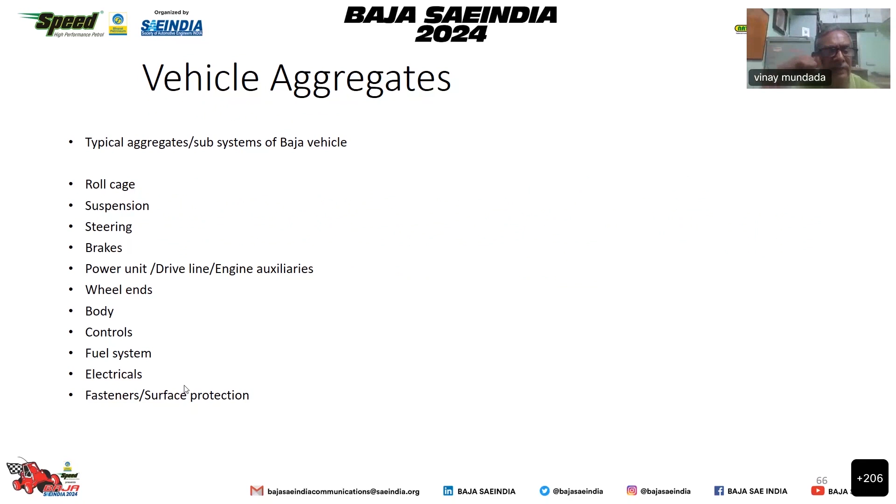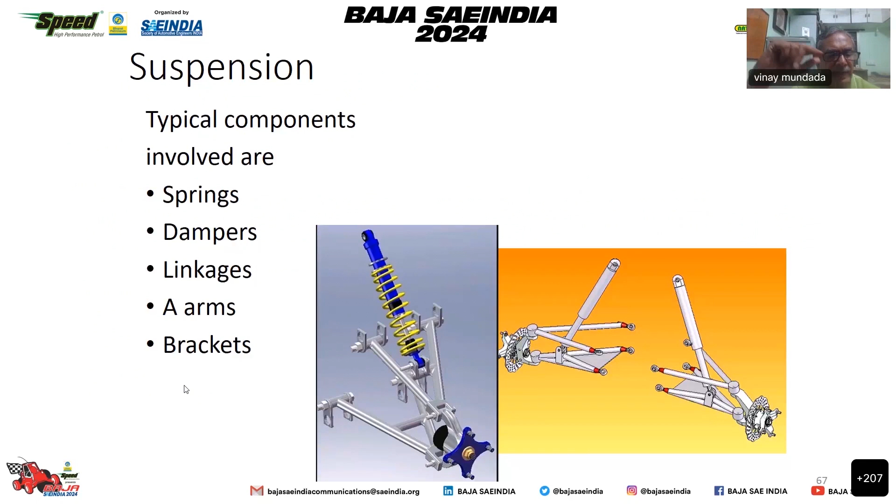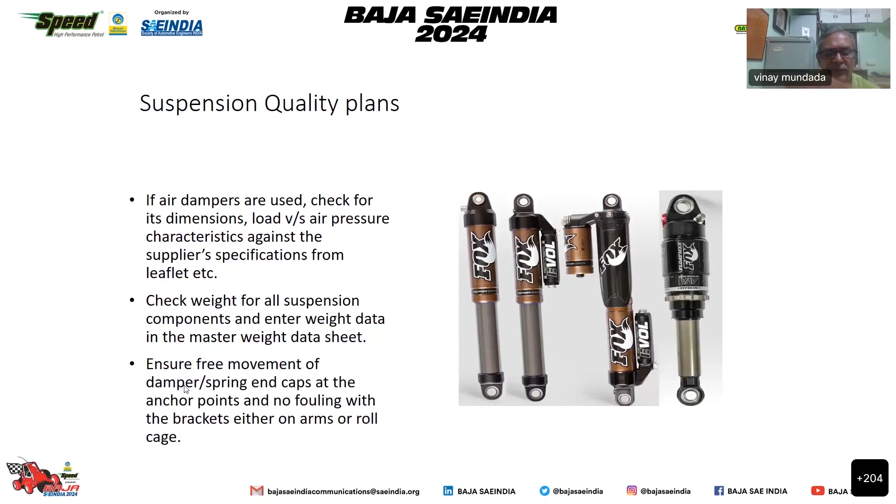This is the air suspension, which uses air dampers. If you are using these, you must know its characteristics, what pressure, what weight, all these must be checked. Ensure proper open and close length so that there are no issues.

Similarly on brakes, we have already talked about it.

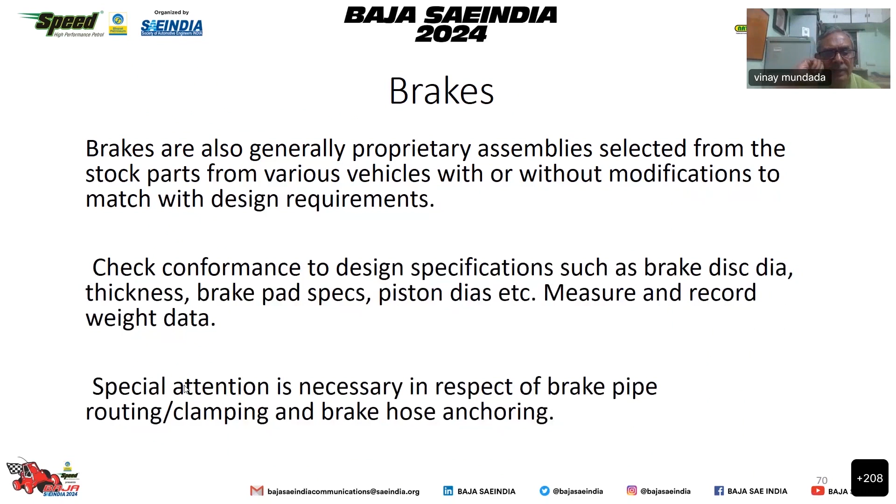Fasteners. I would like to emphasize more on fasteners. Proper size, proper strength, proper length, quality, grade, proper surface treatment. This is most important. This is one of the major failure items during the events at Pithampur.

Including in technical inspection, your vehicle generally gets rejected because you have used incorrect fasteners. So use of plain washer, spring washer, nylock nut, castle nut - this is very, very important, and 100% inspection is necessary. You must have color code marks after inspection, including tightening check.

Typical fastener - this is from your old textbook from the first semester of engineering.

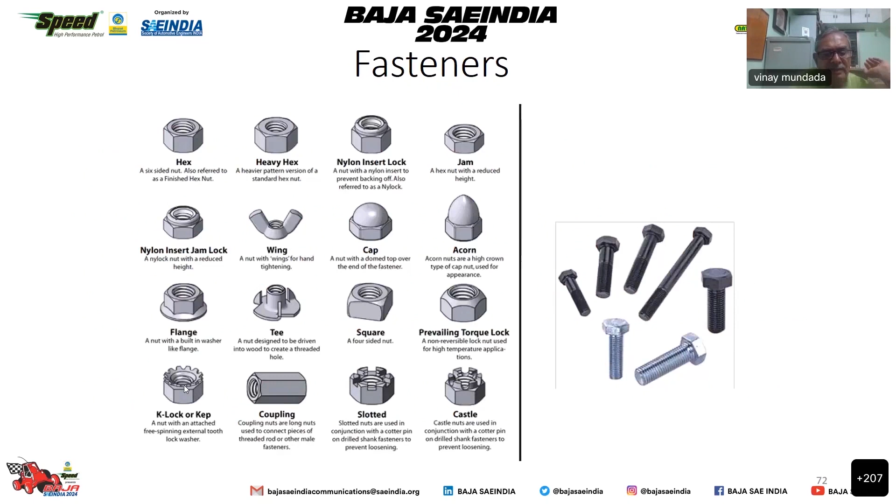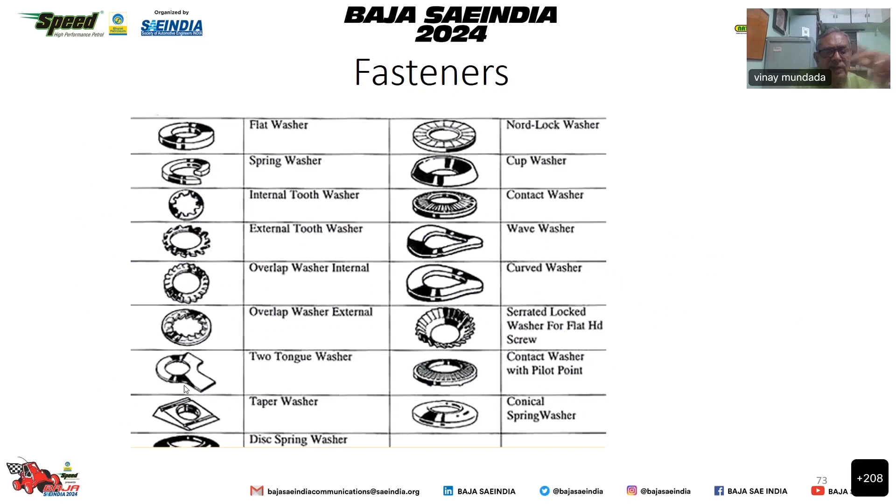Finishing and surface protection. Normally many vehicles come with all corrosion and all kinds of issues, whether surface treatment is not done. So everywhere you must ensure a proper fit and finish - no dents, no cracks, rust, weld spatter, sharp edges should be avoided.

Proper surface finish should be done using different types of plating, phosphating, blackodising, painting, zinc plating - whatever is necessary. This will ensure the vehicle appearance is very good, as well as it will be prone to fewer failures.

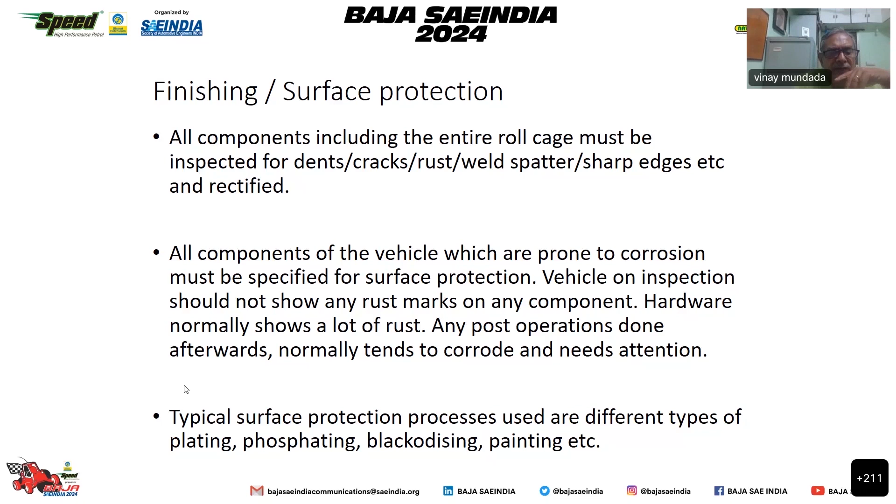I think this must be the last one. If there are any questions, we will answer now, or it can be done after Akhand's presentation. Hariharan, over to you.

Thank you so much, sir. We'll be taking the questions once Akhand sir is done with his presentation. Okay, good. Thank you.

I think Hariharan, we can take questions related to Mundada sir first and make him free, and then I can take the session later on. Sure, sir. Okay. Vishnu, can you please open the chat box? I already have opened the chat box. Okay, so participants, you can now post the questions in the chat box, and we'll try to answer them.

I think if the questions are generic, like mBAJA dates and all that, nothing related to Mundada sir, we can address that separately. If something specific to Mundada sir, we can take that right now. I think Hariharan, it would be better if you just simply read out one by one questions, and whatever is to be answered will be answered. The rest you can cover later.

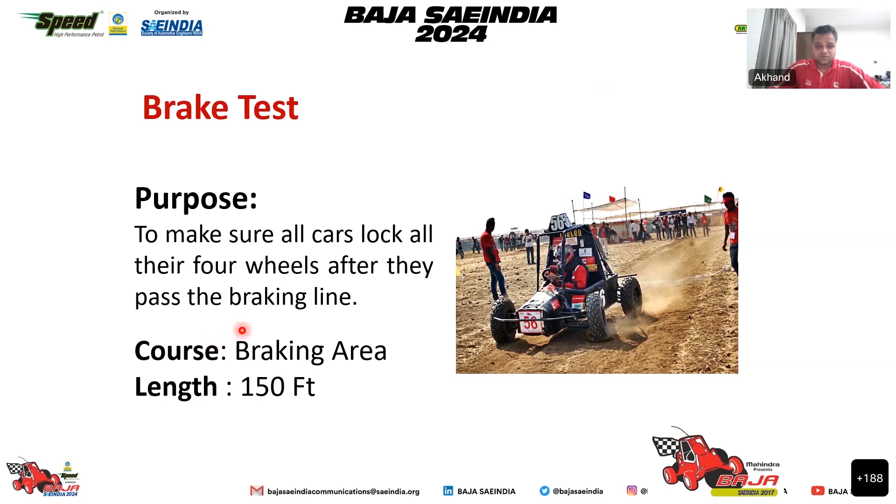You can actually simulate this test in your college - it's very simple. Brake procedure: the car will line up and it is started on a linear patch. The drivers will be briefed - there will be a start point and an end point. The driver has to accelerate from start to end, and after the end, there is a braking zone where the driver has to apply panic braking.

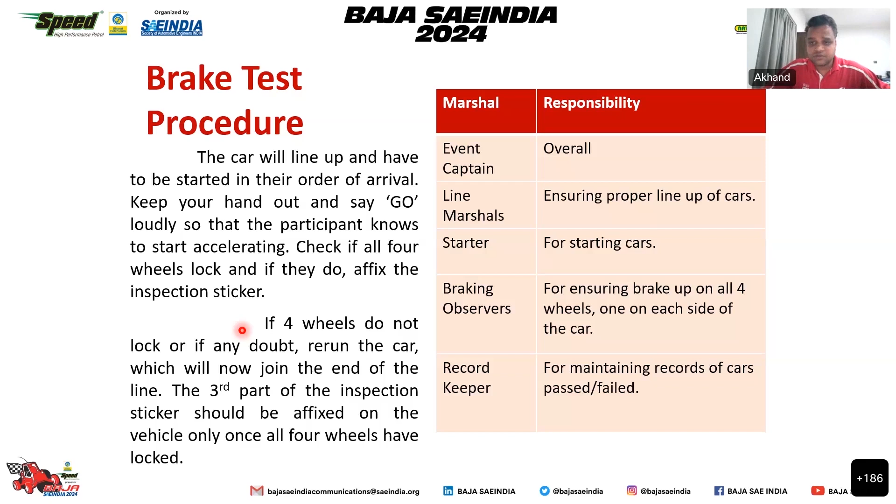Panic braking is very important to clear the brake test. You have to hit the brake pedal once so that the complete brake fluid pressure is distributed to all four brakes immediately, and the brakes lock. If any of the four wheels do not lock, you will not pass the test. Skidding is okay, the vehicle might drift after braking, but the wheels should be locked. This is how the brake procedure looks like.

It has applied brakes. All 4 marshals have given thumbs up, so the vehicle has passed. This is how the brake test is conducted. You can have a similar kind of terrain in your college, a 150 feet straight patch, where you can have a start line and finish line, and do this brake test at your college level before coming to site.

Make a video or document the timings and all that. But important thing, you have to reach the max speed before you apply brakes. Is that clear? Sorry, so this is an online session, I have been used to talking to students directly.

So, acceleration test. Now from here we come to the actual dynamic events. The test is very simple. The fastest vehicle gets the maximum points. So there is again 150 feet straight patch.

Additional 50 feet for braking. There is a start line. There will be a count given to you at the start: 5, 4, 3, 2, 1, go. You have to accelerate at full speed, cross the line, brake, and the timing is noted. The timing is noted through sophisticated electronic systems.

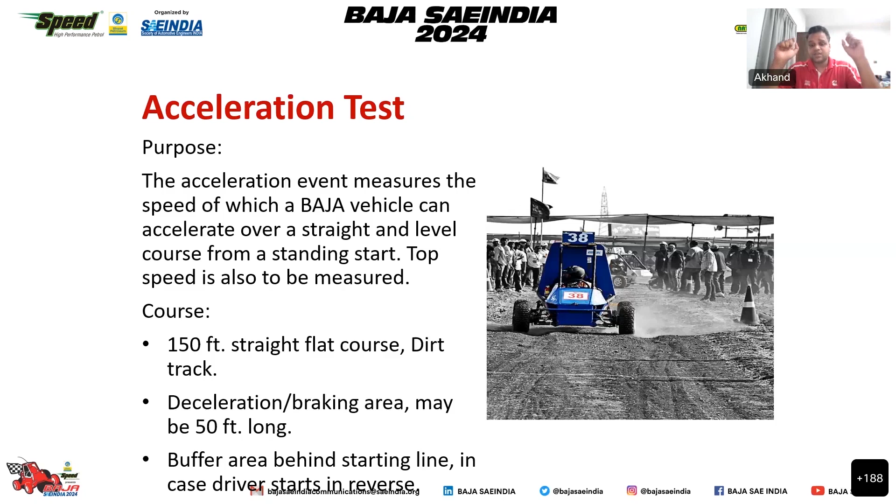Again, the procedure is the same. So make sure that whenever you report to any dynamic event, your driver is kitted up properly. He is wearing all the safety gears, buckled up, and along with 2 team members, he is reporting at the dynamic events in walking pace. The vehicle should run at walking pace.

Once he reports there, he will be briefed quickly, lined up, and the vehicle will be launched. So do not waste time. We have seen teams pushing the buggies to the dynamic events and the driver walking and then getting ready. It's a waste of time for you and for us. So be prepared whenever you come to any track, as if you will be given a chance immediately.

So that's my submission here. I've seen teams not coming prepared properly.

Acceleration trial. This is how the acceleration trial looks like. See, this is the start line. The marshals are briefing - the marshals are people in the red t-shirts. They're briefing the driver. It's gone, it's accelerating.

And this is the buffer zone braking area. See how narrow we have it. Now we have different tracks, but where we have space. So from here, he has to take a U-turn, and from this point again, he has to go at walking pace. So whenever the vehicle is not on track, they have to adhere to the walking pace policy.

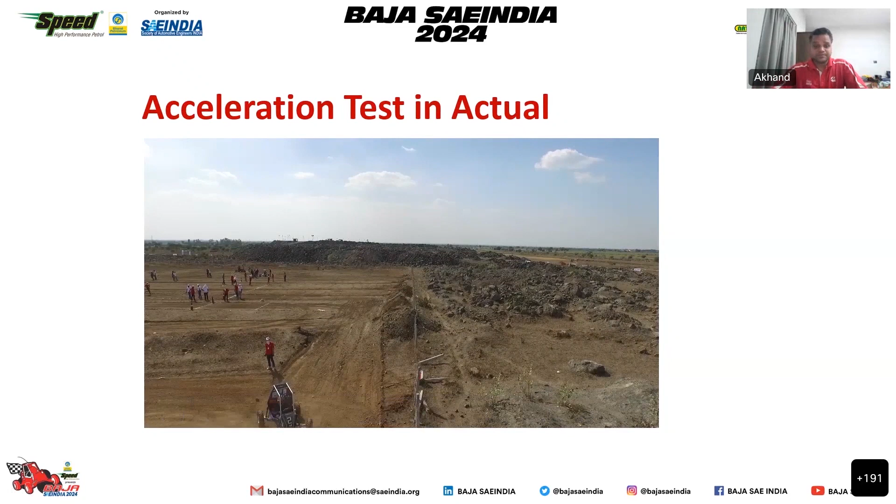Next test is maneuverability. This is to check your steering and suspension mechanism together. It's a series of zigzag tracks with loops, figure of 8, or different kinds of patterns - so it's different every year.

There is a start point, there is an end point. You have to do the track in the least possible time. There are penalties in this track. This is the new thing that's involved in maneuverability - penalties. What are those penalties? I'll explain about that. But again, doing the track in minimum time is the challenge, is the task that we have to do.

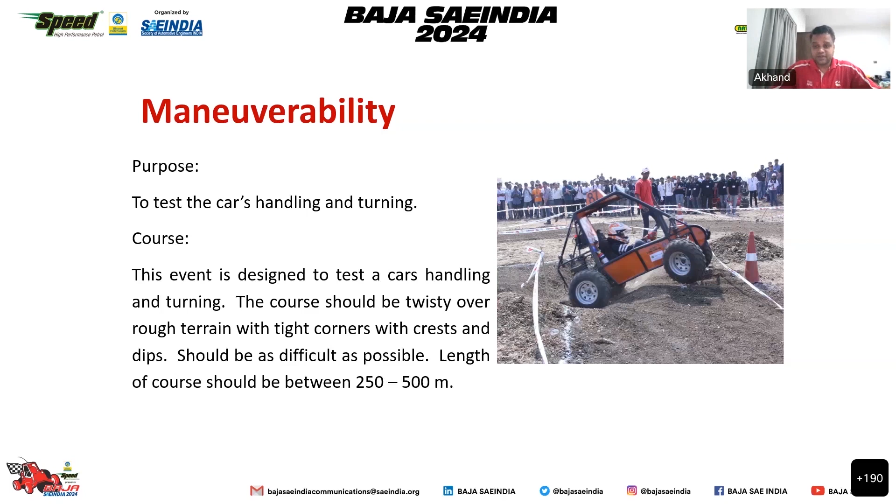Again, the start and end procedures for all tracks are the same. Report at the track completely kitted up. You will be briefed about the track. You can take a track walk, ask the track marshals to give you a track walk, or you can observe one of the two events before you attempt.

Turns - memorize the turns. We also try and put up a diagram of the track before the start line, but that diagram usually doesn't help, because track walk is what gets all the turns into your muscle memory before you attempt. And again, it is demarcated properly.

It has markings, so you follow the markings and can easily navigate through the maneuverability track. Try not to hit the cones. You can go slow, you can take all the turns, but try to get as few penalties as possible.

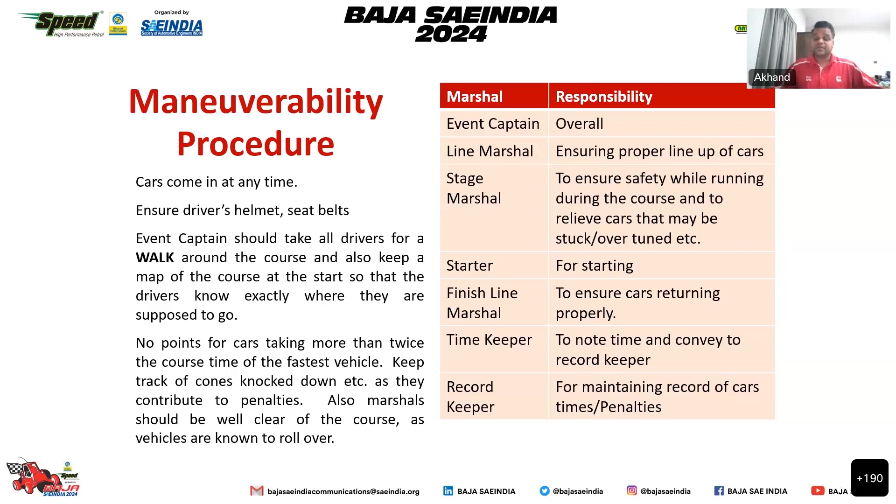We have seen teams doing the track very fast, but they hit a lot of cones, don't complete the gates, and get penalties. We understand you're in a rush, the atmosphere is pumped up, but at times you need to be sensible in deciding your speeds and how to take your turns.

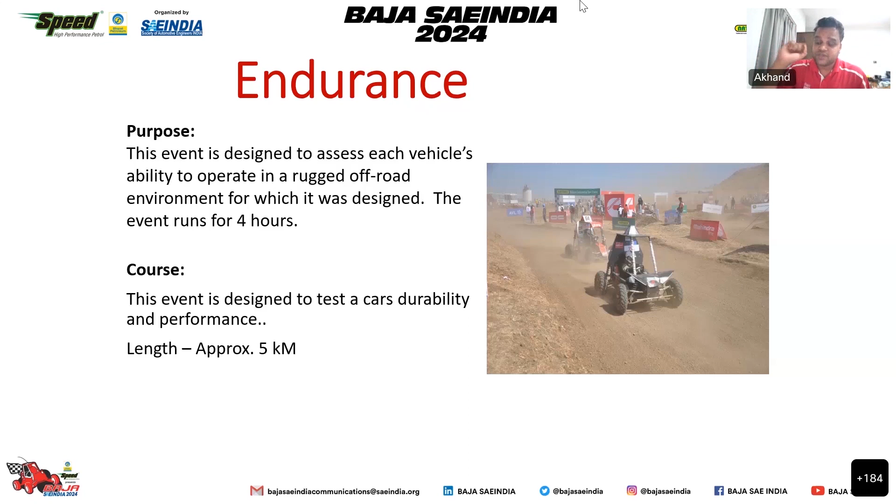So there are some do's and don'ts for endurance. We have a driver's briefing one day prior to the endurance race, and we also try to give a course walk for drivers so they see how the endurance track looks like. Attending that driver's briefing and course walk is mandatory for all team members. We make a note of that because it helps us explain to them one day prior to the event how the track looks.

Repairs are not permitted on track. If a vehicle breaks down, it will be towed to the pits. There are flag rules on track - I'll explain about the flag rules during the event, but those are also mentioned in the rule book. You can read it, but more specifically, we can talk when we are on site.

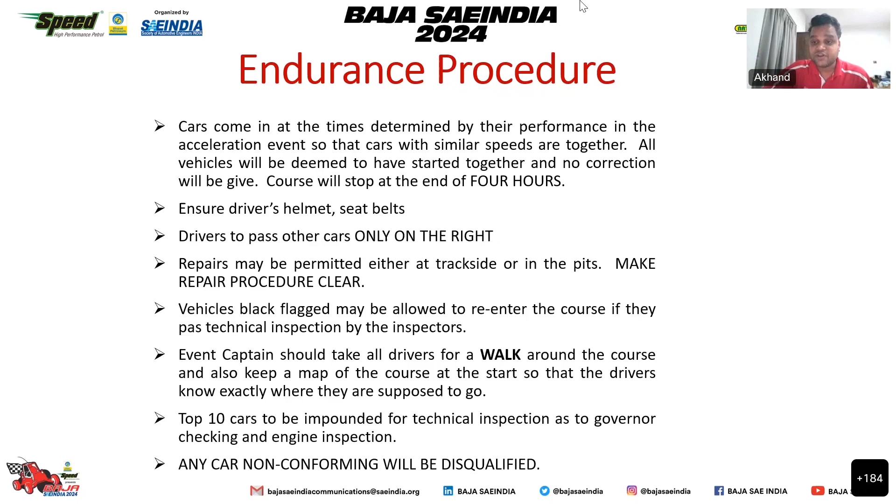Post the endurance event, the top 10 cars are impounded and checked again. So you will be called to a specific area for impounding if you are in the top 10 list. Any car which is non-conforming to our rule book or safety protocols will be disqualified. We have disqualified cars for team members being on track. So just be sure that you do not violate any norms that have been laid out - they are laid for your safety and better operations of the event.

Special mentions - I explained about penalties. There are penalties in dynamic events, in maneuverability, in suspension and traction, and in sledge. Sledge pull is basically an event where the vehicle tows a load attached to it to a specific distance in the least possible time.

Fueling needs to be done in a safe manner and in a specific area designated by the event organizers. Collect your fuel passes and get your vehicles fueled. Follow the specific pit rules given in the rule book.

Remember, you guys are engineers. You're going to be in industry in the future, so maintaining safety and standards of operations while you work is very necessary. You're not mechanics, roadside mechanics. You are not doing any jugaad there.

So whenever you do welding, cutting, or grinding, wear proper safety gears. Do not come in chappals at the site. Always wear shoes and full clothes so that you're not exposed to any kinds of cuts, bruises, or injuries. The site is a jungle site, there are fears of snakes, insects, and all that, so come properly dressed up.